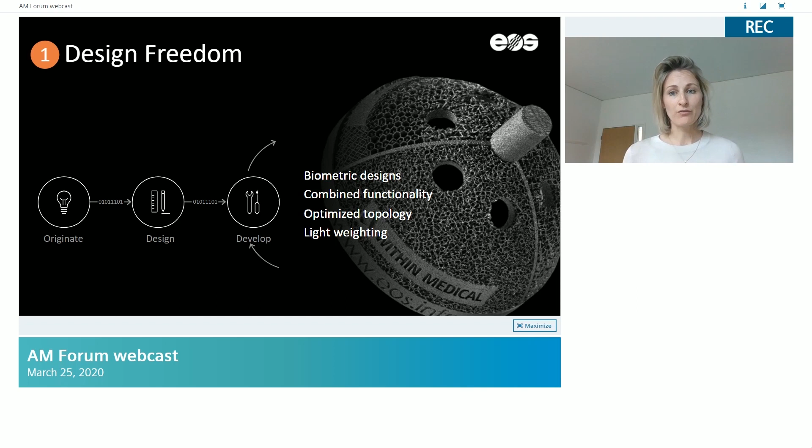So one example is parts in a cooling fan. Normally you need to have over 70 parts assembled to have this fan working in a cooling system. And with additive, we were able to build that in only one part. And I think you can imagine what this means for reducing the cost that you have through assembly, and also reduction of resources in general, and also material that you waste.

Another great example for freedom of design, and I have them here in my hands, are some insoles that we're working on together with our partner Aetrex in the US, and we were developing that for 2 years. The philosophy behind that is that no feet are alike. What we have a lot with shoes is that we have shoes that are the same, but actually our 2 feet are not the same.

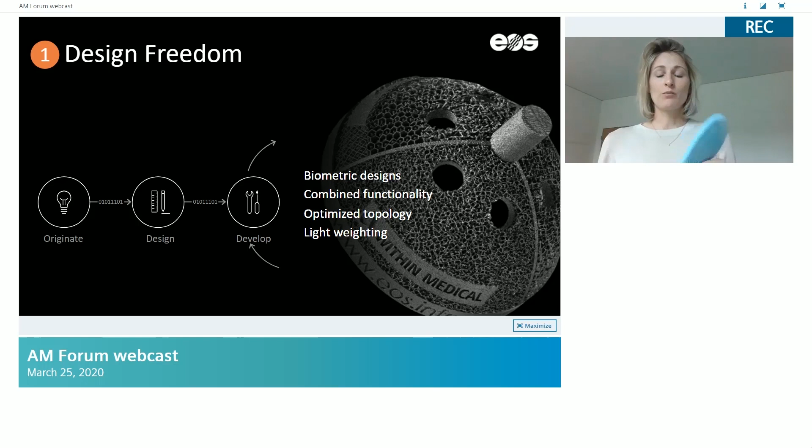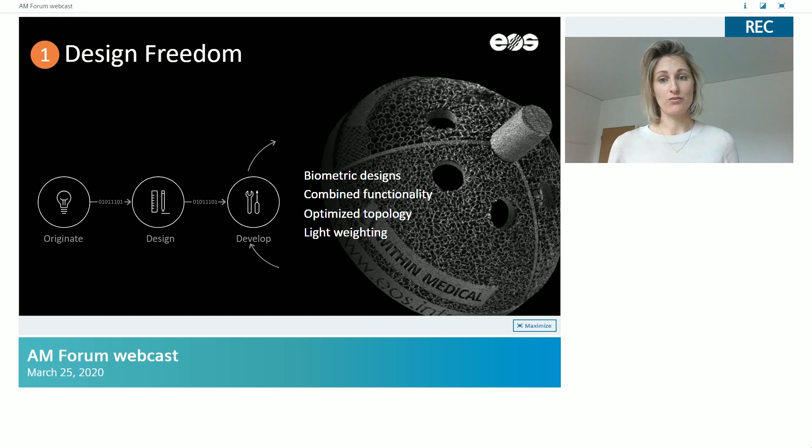So with additive, and the great scanning system and solution that Aetrex was offering, we were able to produce these insoles, making sure, and maybe you can see that here, that every part of the insole has a different thickness, fitting to the criteria and the pressure map that the scanner shows us. So making sure that it fits the feet best and supports the feet the best way possible. I'm really excited about this project because we can see here what kind of great product innovations we can realize with additive.

So another point that I want to talk about is speed to market. And there's an example, I also have it here. It's developed by our customer HEXR. We were supporting with that. And what you can see is not only that you can customize it, which is a tendency and a demand that we see in the market right now. And it's through a digital app. So you have it on your iPhone, you can scan your head, and within 1 minute you have your file that is fitting perfectly to your shape.

And what was realized here, with the way this interior was designed, is that the pressure the bikers could get when they fall down is much better distributed than conventionally. So it's a much safer product. And talking about speed to market, here the product development time could be reduced from 2 years to 3 months, which I think is massive. And when you talk also about distributed manufacturing and on-demand manufacturing, that is a very important aspect in keeping up the speed. I think that's a great example that I want to share with you.

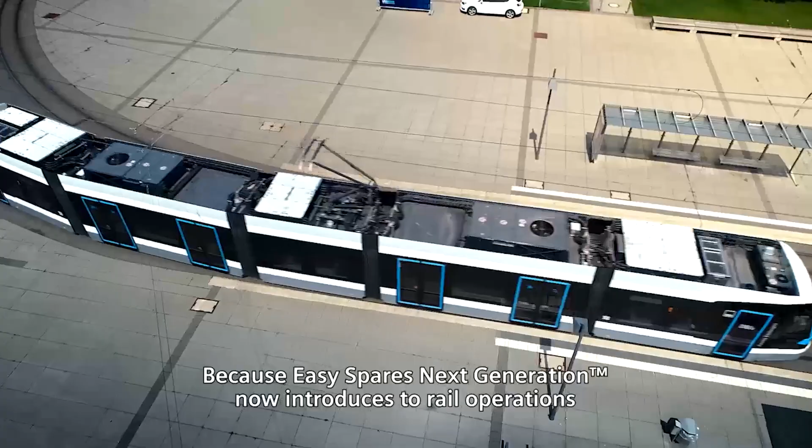Time. It runs our world. It's fundamental to our daily lives, and we prize it highly, both in our private lives and in business. Because when we save time, we create efficiency. Easy Spares Next Generation operates on that basic principle. Because Easy Spares Next Generation now introduces to rail operations what we've already been enjoying in our everyday lives online. Extremely fast, simple, and reliable delivery.

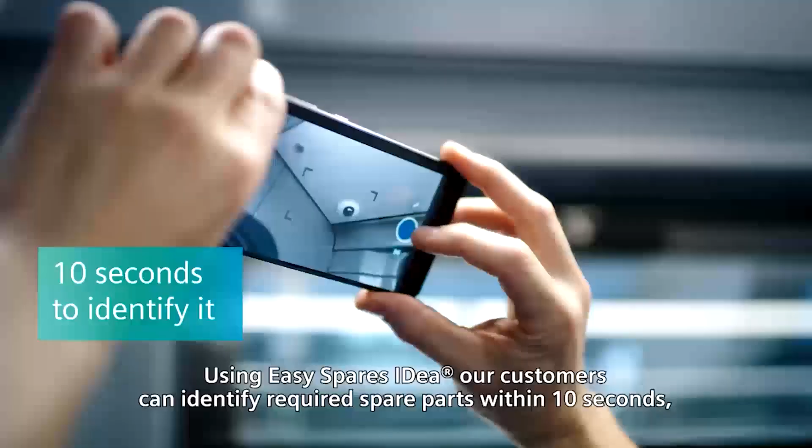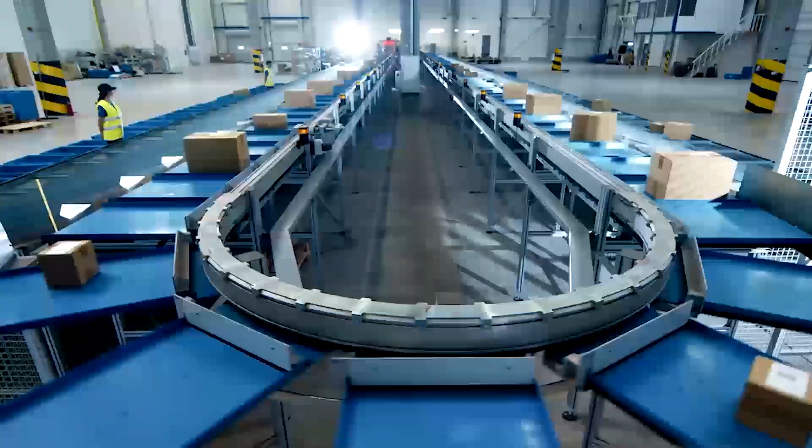Using Easy Spares IDea, our customers can identify required spare parts within 10 seconds, order them online in 3 minutes through Easy Spares Marketplace, powered by RailMall, and receive them within 24 hours. That's how our customers not only save time, but also lower their costs and guarantee their passengers optimum availability. Siemens, ingenuity for life.

Within the Easy Spares Marketplace, you can order your spare parts from your physical stock within 24 hours, or if not available, from our virtual stock printed on demand. But why do we use additive manufacturing for spare part supply, as we have all relevant spares on our physical stock? In the rail industry, we have a lot of different vehicles all over the world with low and medium quantities. They are in operation for 30 to 60 years. Some spare parts are required after 15 or 30 years for the first time.

If you try to order this part from your previous supplier, or if you want to restart the production in your own facilities, you will most likely have problems like one-time costs or minimum order quantities. Siemens Mobility, as one of the first rolling stock providers, identified additive manufacturing as a solution for print on demand and manufacturing close to the location of demand, instead of manufacturing thousands of parts and taking the scrap risk. This technology was used before mostly for prototyping. To use it in a conservative and strictly regulated rail business, you have to solve a lot of topics before. This is what Siemens Mobility has done since 2013.

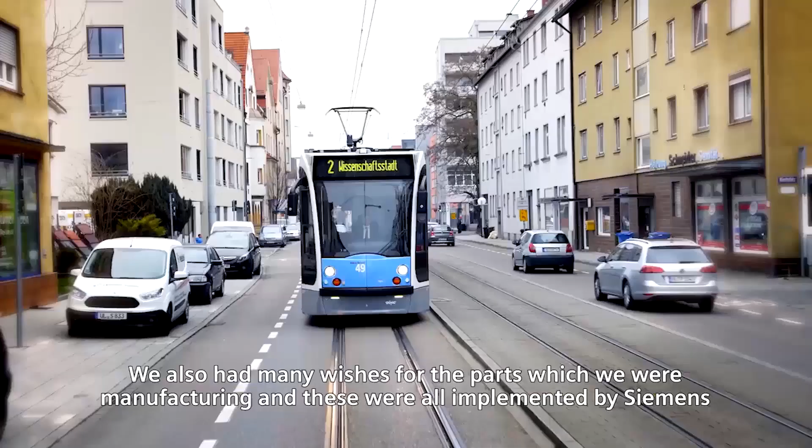The important point is that we have established qualified business, engineering, and manufacturing processes, which are certified according to all rail industry-specific regulations. These processes are the basis for our worldwide locations, which are in regular exchange with our Center of Competence here in Erlangen. The Center of Competence can check the status and the setup of the network printers online and review the results of the defined quality tests.

Also, all engineering work results will be finally checked by our experts here in the Center of Competence. Wherever a spare part will be printed by Siemens Mobility, it will be the same high level of quality. But additive manufacturing is only one part of our digital service portfolio, as you can see now in the next video.

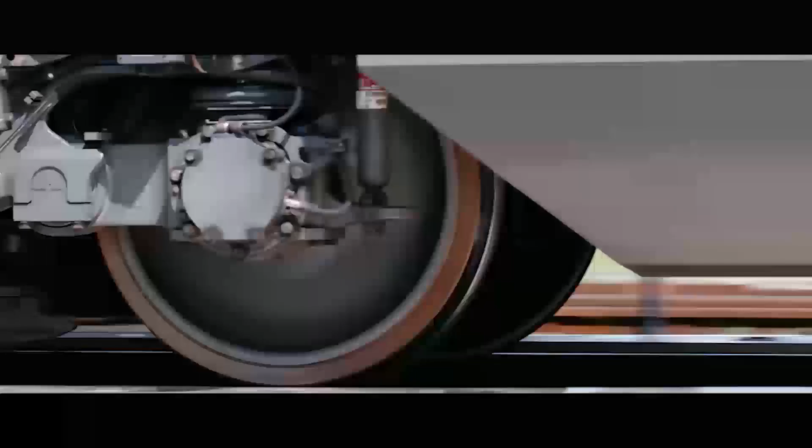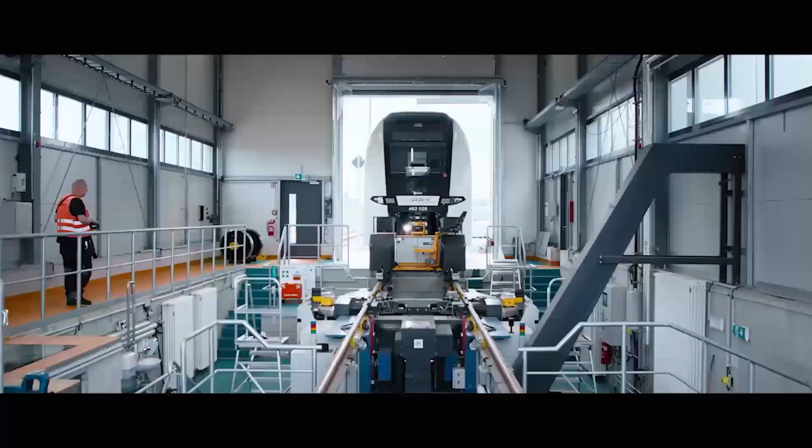What does it take to be the best service partner for railway operators? Operational streamlining, inspections, and maintenance all under one roof. Paperless, our fully digital depot is a world first. Using our open ecosystem Railigent, we combine the latest software, technologies, and processes to create a network that works in perfect harmony.

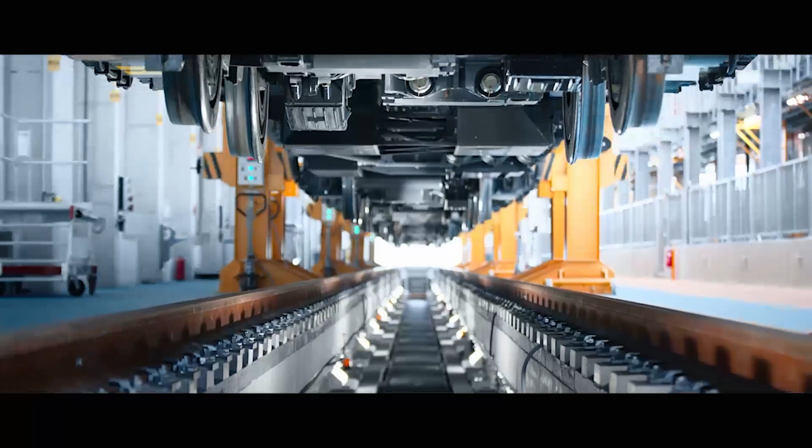The ability to predict and eliminate errors before they occur. Thanks to our servicing experts and our skills in data analysis. Everything prepared and in place. That's why your train is back on track quickly and on time. Every day and every night. For 100% system availability. Helping your trains exceed your customers' expectations.

So as you can see, it's only a small part of our digital services, but the current entire process chain, including the quality assurance process, is very complex for additive manufacturing in comparison to conventional manufacturing. And maybe you can imagine the required efforts to manage the process with tools which are either not available or working with different data formats. The result is a huge manual effort to hand over data without loss of data quality.

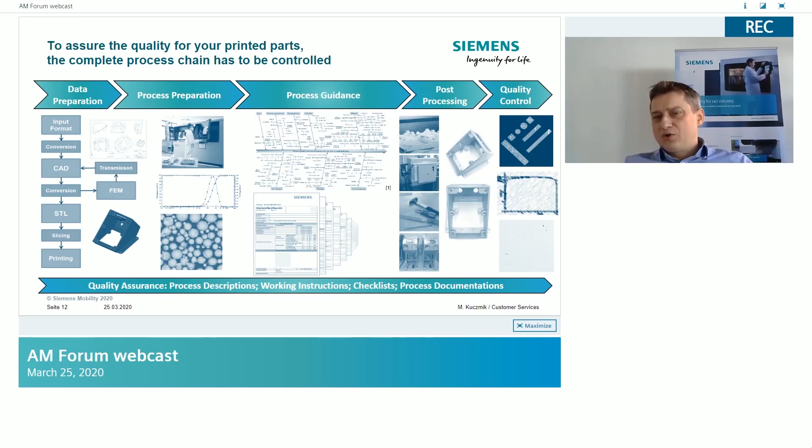This intensive work is not appropriate for a depot where the employees just want to print a spare part and do not want to be specialists for additive manufacturing. Carsten, perhaps you could show us now how Siemens Digital Industries can help the users and the machine providers with these challenges.

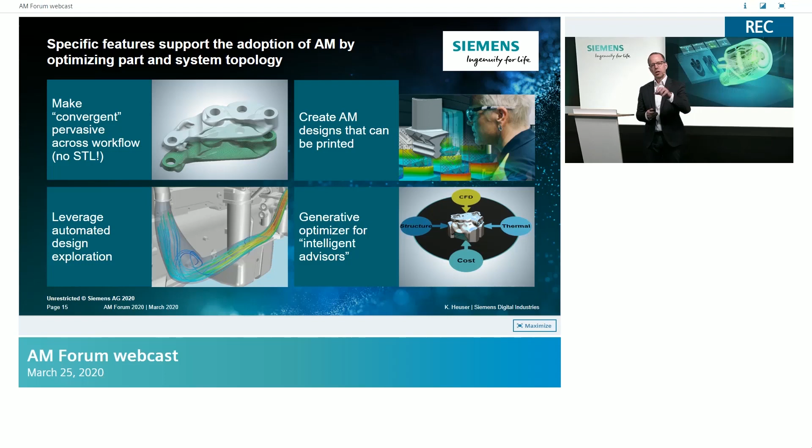But if you dive in this digital twin one level deeper, then there's a material. We heard already from Marie on the material, and Michael talked that the process chain needs to be under control. And therefore you see two examples here: next to the most powerful digital twin of the product, we now have a digital twin of the material. Digital material can be designed and optimized by software features. Just recently, we acquired a company, Multimechanics, making this possible, that you can optimize the actual material properties before you print and then learn at the end.

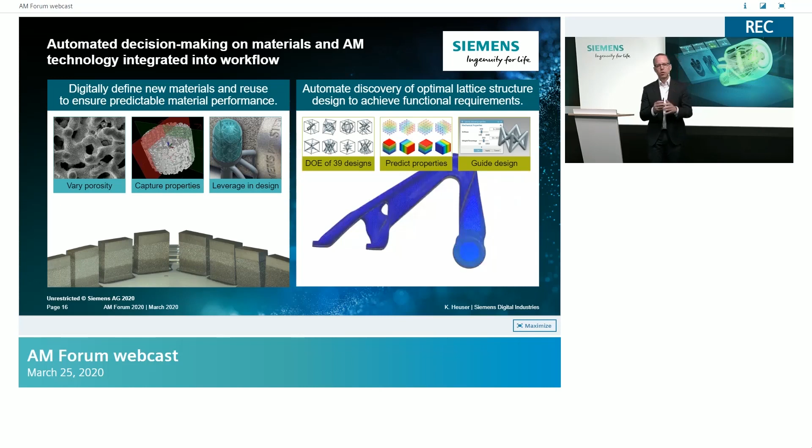Furthermore, by knowing the material properties, you are able to design experiments with specific lattice, and any kind of structure will offer you a full new spread of designs in terms of material. So this makes a digital twin of the product, but then the next situation is people very often still try to print and find out it's not working. And a lot of power goes in Siemens into the development of tools for the macro and the meso level defects through simulation prediction. Here you see the examples.

Pretty easy, a tool which is from Atlas 3D. We acquired Atlas 3D at the end of last year. A very easy tool where you can combine now deformation with support structures. This is a cloud-based tool. It will be part of our AM network later in the year. And it's a pretty easy to use tool.

And in the middle, you see another prediction tool where layer by layer, we can in the meantime predict the thermal behavior in a selective laser melting process. And even further, you can now start not only to predict, you can compensate by the software to have a first-time right printing. And another step forward, at Formnext, we presented for the first time that another tool is coming up on the horizon. And there we can optimize the tool path to eliminate localized defects before you start the printing. What is the benefit of this?

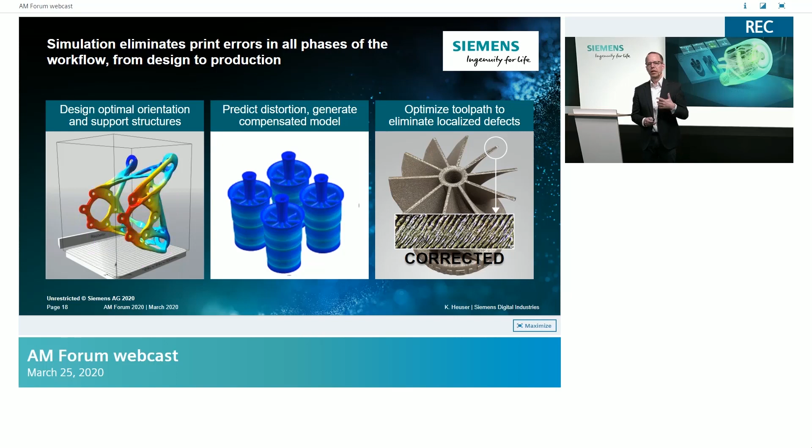This lowers at the end the production costs because it's first time right printing. And with this, you can really simulate the process before you start printing. Now, if we are now finished with the digital twin of the production, the process, the next step is how to plan, run, and monitor an efficient entire additive manufacturing factory.

One aspect is on the digital layer. For sure, you need to have a software to plan and execute when to do which job on which machine, from configuring the machine to getting worker instructions directly at the machine. It's paperless, and we have proven this in different kind of facilities already, to managing the processes, traceability, tracking of all your powder, recycling the powder. So this makes the digital backbone to plan and execute the factory on a digital layer.

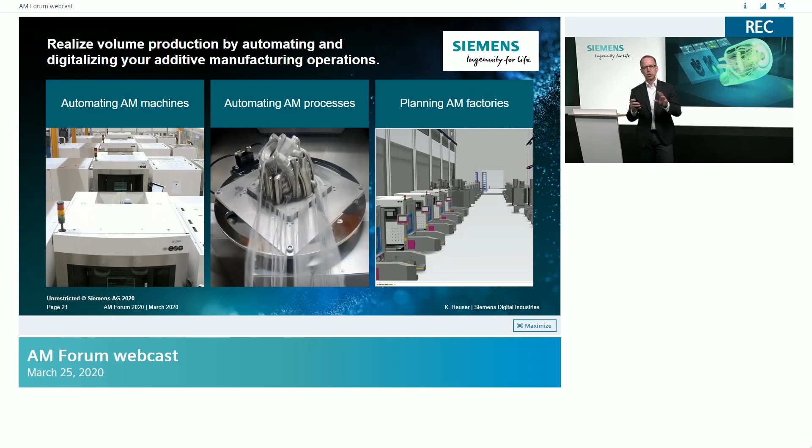And then last but not least, we're moving into planning full-fledged additive manufacturing factories. We have a planning team of consultants working together with our machine partner to plan digitally with our tools complete additive manufacturing factories. The input parameters are the machine, the costs, the requirements, and the output parameter is the quantity of the production, the throughput, the staffing, and everything like that to really plan and operate the factories very efficiently.

But last but not least, when you install the factory, you need to be sure what happens inside. And there, once more, you have two layers. You want to know at all times, how is my machine doing? How are all the machines connected from the different entities here? And it's about machine monitoring.

With our cloud-based MindSphere solutions or Mendix as a platform here for low-code coding, we have proven in the meantime that you can connect and get a system with all different kinds of machines in one dashboard to really manage and improve your efficiency of the overall equipment in your factory. Already a few leading players are connected in this system and are working.

The next step is how to optimize the cooling of an ICE train. This is now a concrete example, and I want to send my regards to Helmut Zein in Hamburg. Helmut is heading the team here and worked for the AM Forum to make this use case happen. And this is done as well in collaboration with Michael from Siemens Mobility.

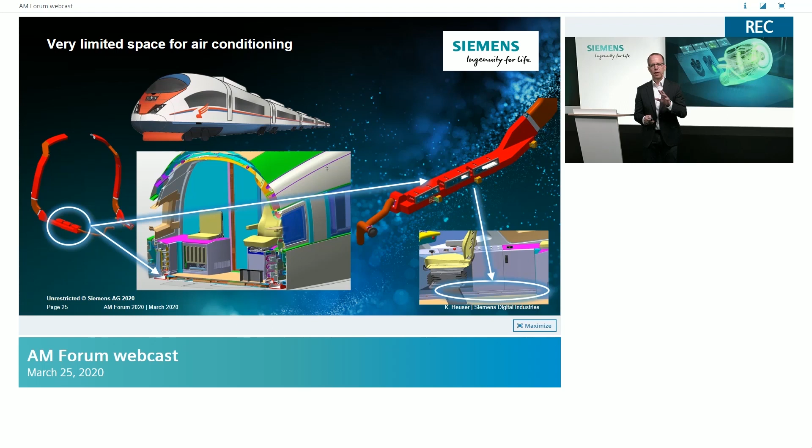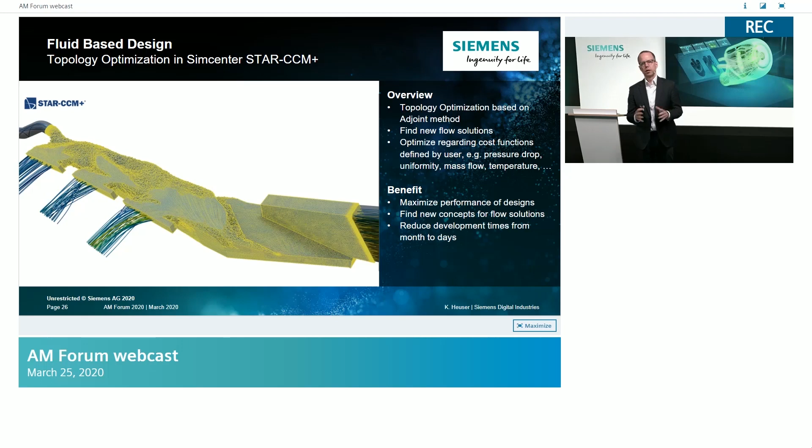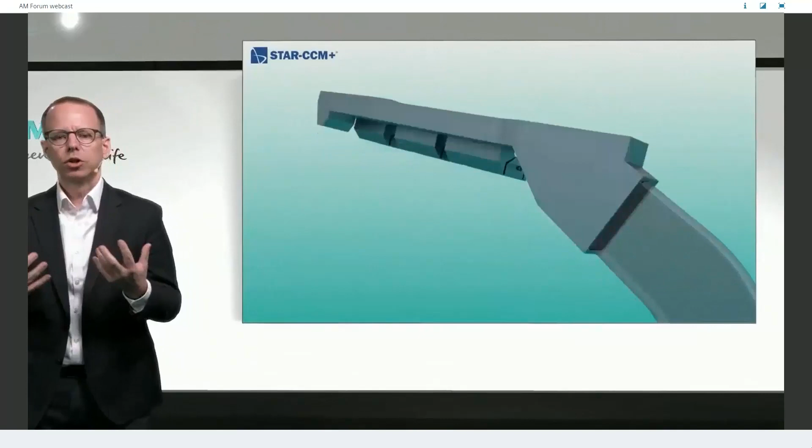Let's dig into this in examples. First, our experts took the 11 parts and threw the 11 parts in our software and transferred it in one software tool, which is part of our Simcenter STAR-CCM+. And now we see in a movie here coming up how it looks that our STAR-CCM+ now becomes more or less the designer. So the software is now starting to iterate in many, many steps.

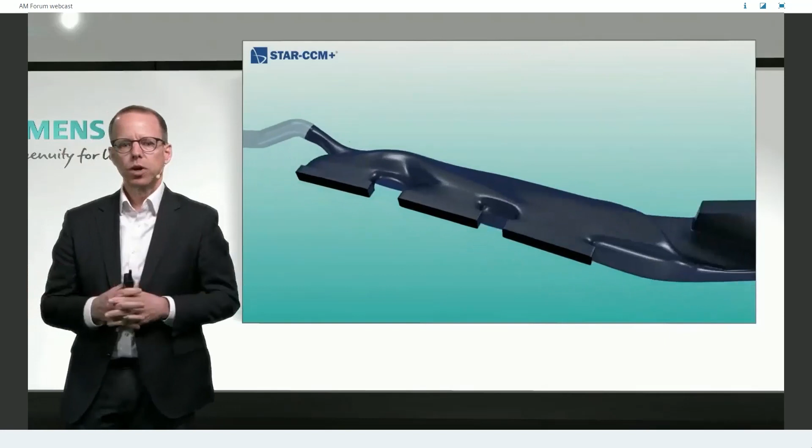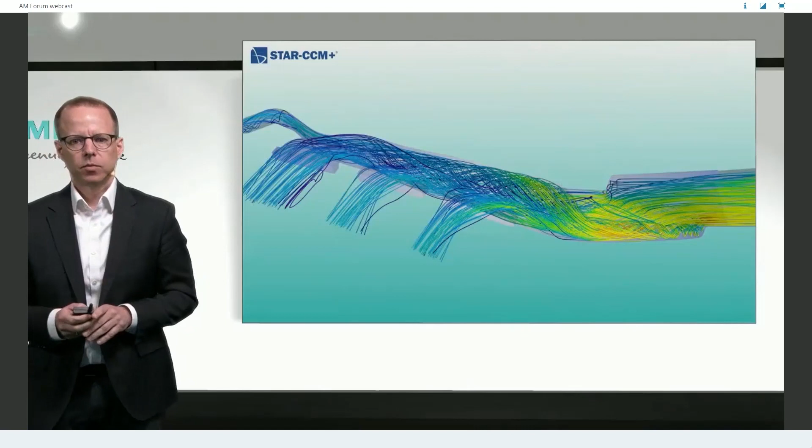And here at the end, it was more than 100 to 200 iterations to optimize the design to the perfect flow and to the least pressure drop along the area. By that, you come up with a crazy fancy design normally, which is optimized for the flow. But in the next slide, you will see here, it's not always the best in terms of that you have optimized for any kind of design. Now you have the benefit that you stay in one software suite.

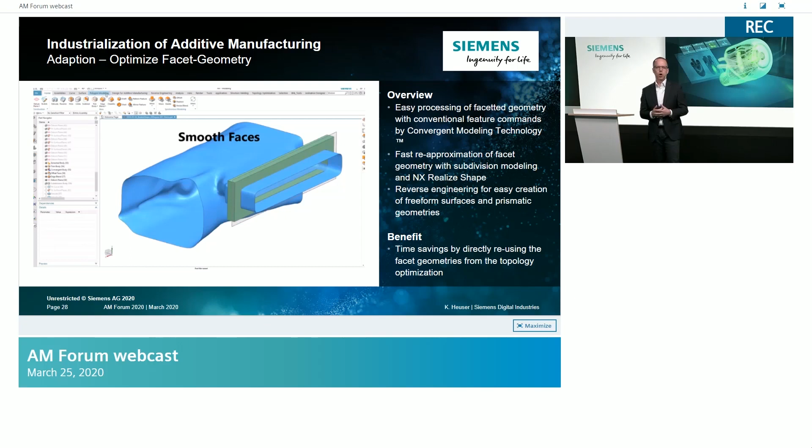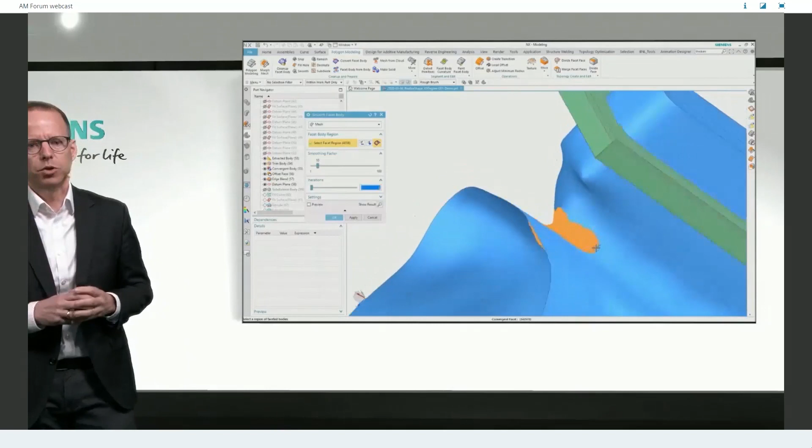And once more, we throw it now into our software and we start to optimize it. In the video, you see how now we can start to optimize areas where probably the simulation, the topology have given us something we have difficulties with in the later printing. So you can paint it, or you can even optimize and automate this process here to really now change, for example, parts of this geometry with your classical, well-known CAD tools, and you can start to optimize it.

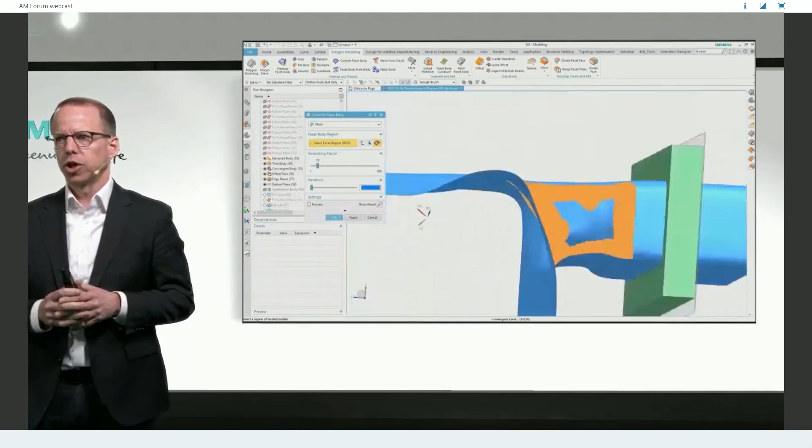You can use and provide any kind of the classical tools as well to further adapt and design further geometries into this design. This saves you a lot of time through a fast and efficient workflow, and you reduce the need for any physical prototype at the end because you can optimize this part already in this software.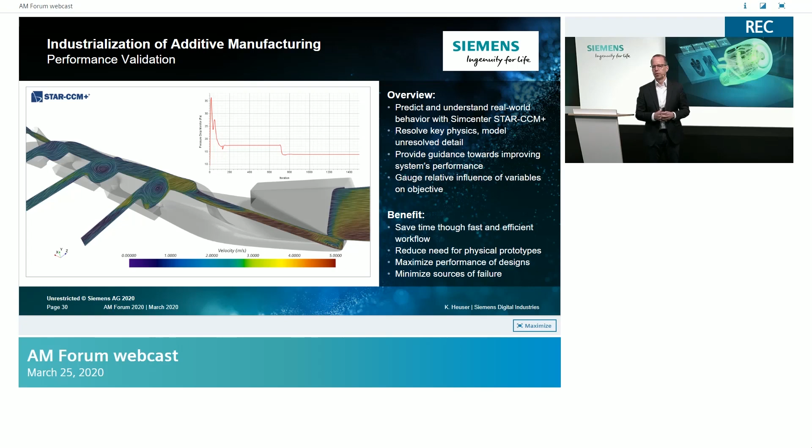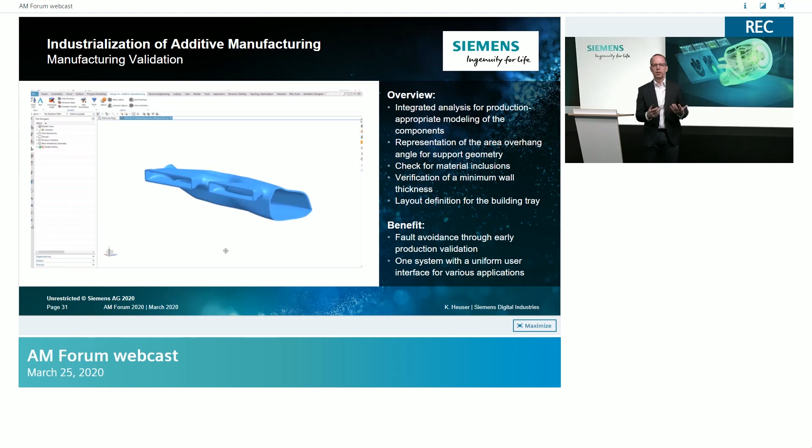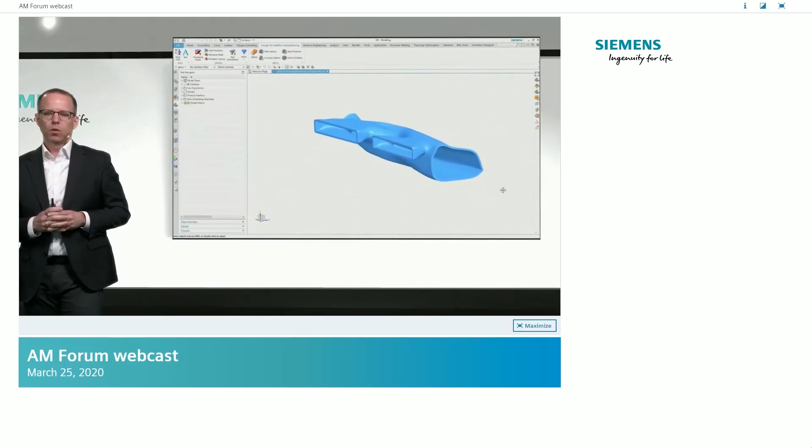So let's go further. Now we have a digital twin of the product finished, accomplished. Now the question is: is this printable? How to validate the manufacturing? Let's go once more into our software suite, where we now start to integrate and look into the production. One first question you would have is: is the part really well positioned? What are the wall thicknesses? Do I have some checkers who can tell me if there are some inner cavities where I would have problems while printing?

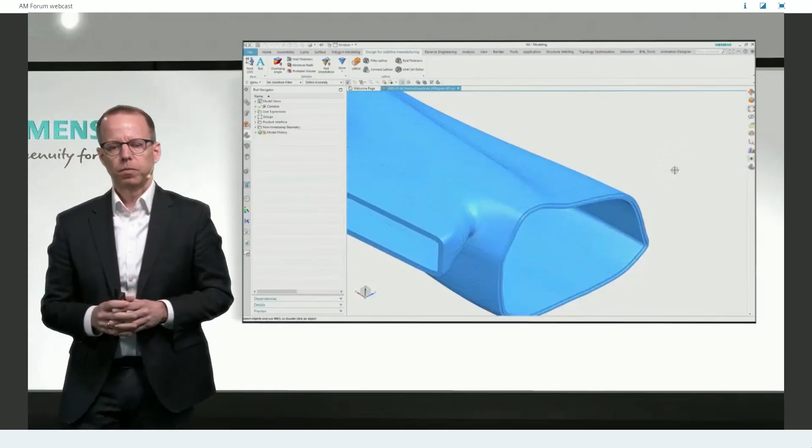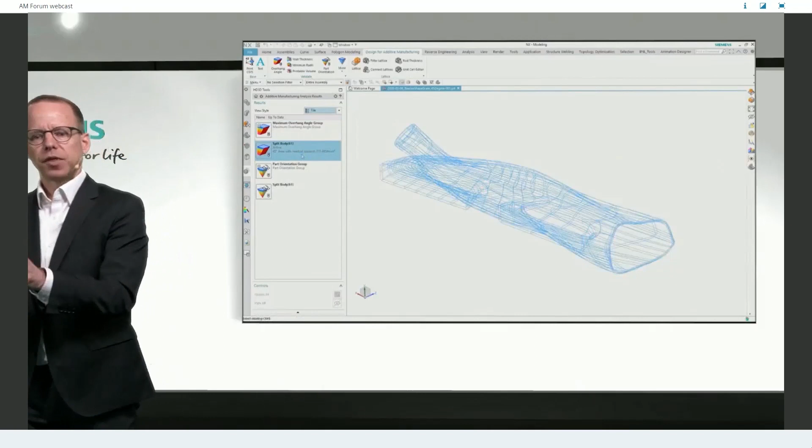So in this part, all these checkers are already in our software. So you just need to use them in the software and start now to optimize with these design checkers, if you have some inner area, if you have some overhang which will not be printed. So a lot of intelligence from the printers is already incorporated. And once more, if you find something here to change, you just go back into the digital twin of the product and you can change it here with a mouse click.

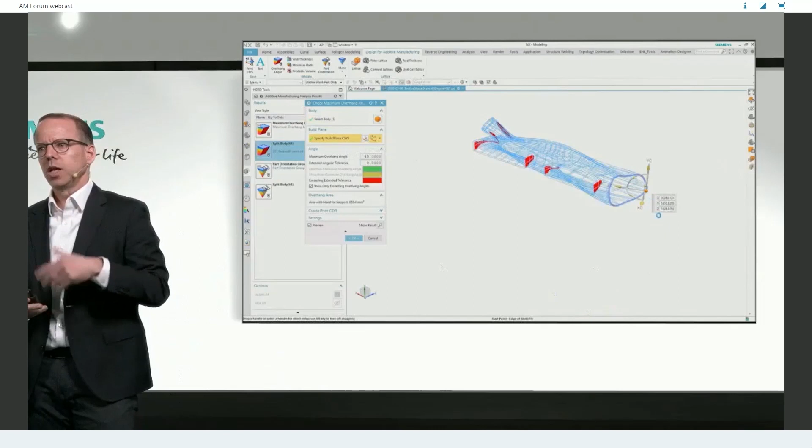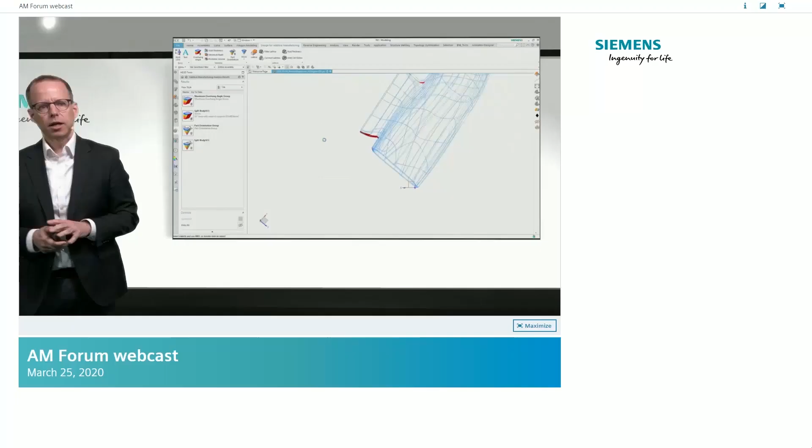Here you see some red marks. These are actually the design checkers where you can really now improve this process. So this is one thing. And the next thing is how to integrate the printer interfaces. I will explain on the next slide that we now have connections through all the Materialise connectors. We have direct printing connectors like EOS Print. As well, with Cura, we now have connections to other printers like Ultimaker.

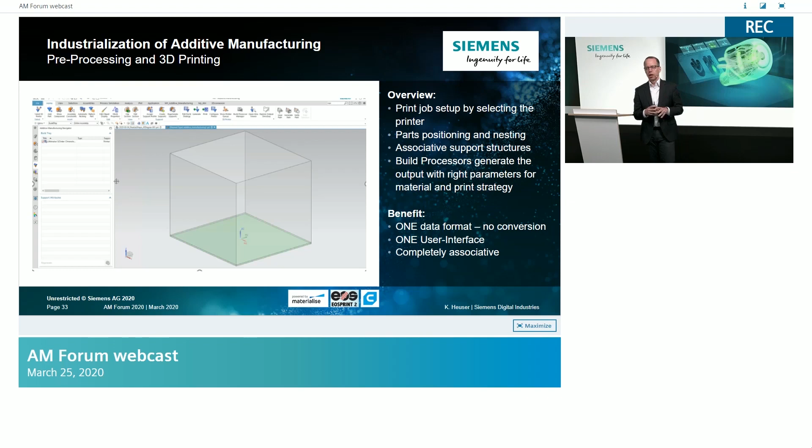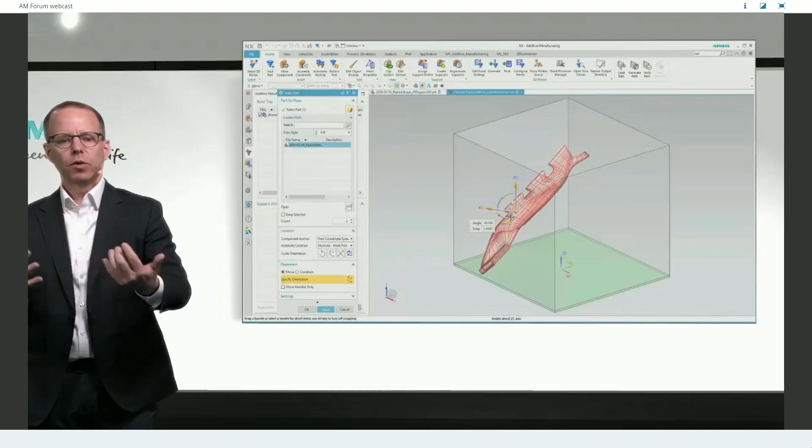And once more, what you want to have is a view into the printer before you start printing. In the next video, what you will see here is that we now have a virtual build chamber of such a printer. In the printer, you upload the part, and then you can start to optimize this part, and we have algorithms already. These algorithms will help you to orient the part based on what kind of printer you select. And depending on that, you can optimize what kind of support structures you really want to use.

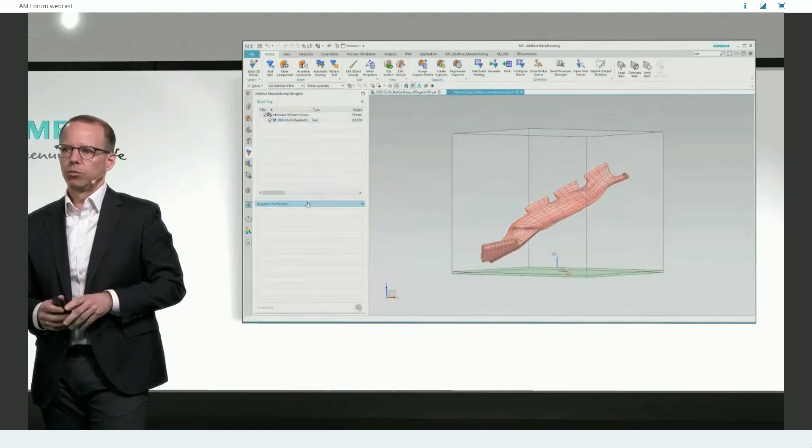And as I already mentioned, in the future with Sunata, this is also on a cloud system, making it very, very easy and automated, once more coming to a really improved flow here. And here you see now how these support structures are generated while I talk about this. This was done on an FDM printer, but it could be done on an SLM or any kind of printer. All these interfaces are already connected.

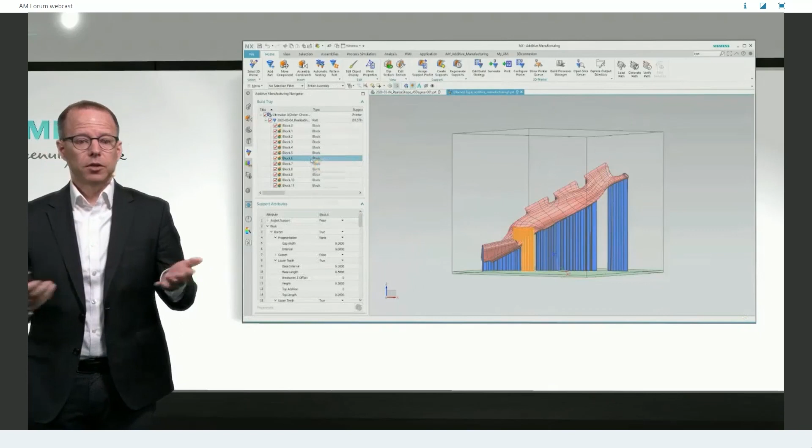So what is the result? If we look into the digital enterprise slide once more on the next slide here, you will see the result. On the left-hand side, we started initially with 11 parts and ended up with a much improved part, which is printed out of one piece. Then we ran through the full cycle of the digital twin of the product and the digital twin of production. We looked into real production, and at the end, we have a 26% flow improvement from this new cooling. And I am already looking forward to seeing it in the next high-speed trains from Siemens Mobility, giving you better air conditioning.

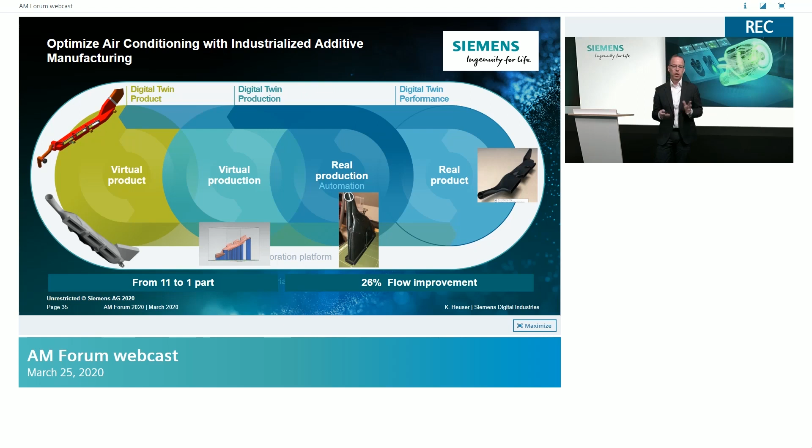So as Michael already explained, what is the rationale of this toolkit, as I just mentioned? It's about tightly controlling the entire process chain, digital and real. It's about ideally designing parts. It's about using cost-efficient measures on low-cost parts. It's about certification. It's about automating and auditing the full production line.

This is what we stand for, what we're working on in co-creation with our partners on the machine system side as well as on the end customer side. And that's what I want to show you in this regard. And therefore, I think, Nicholas, I would like to hand over to you. Thank you for the attention.

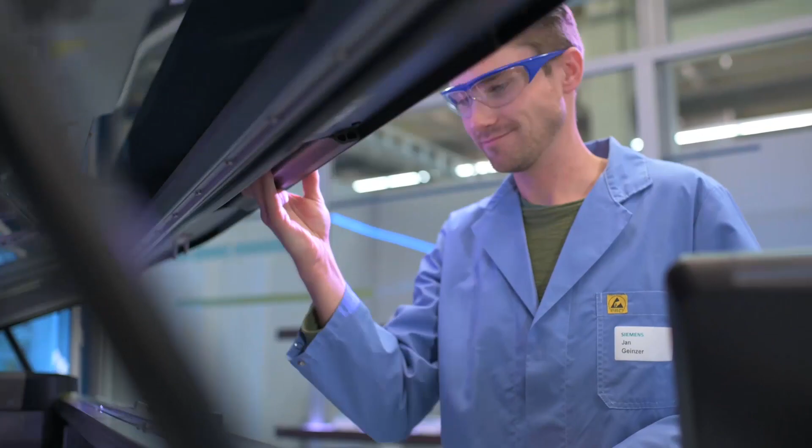The AM Experience Center has been in operation for 1.5 years. And so far we've had roughly 4,000 visitors coming from a lot of different countries in the world. With a team of technology experts running the different kinds of additive manufacturing technologies, we have more than 50 portfolio elements of the Digital Enterprise solution installed live.

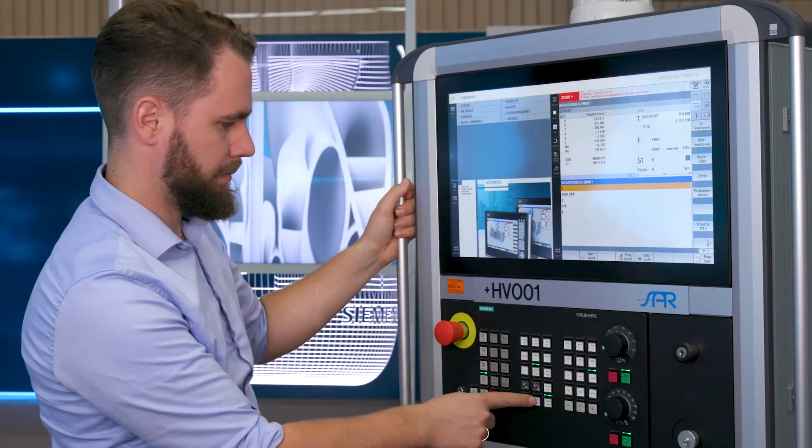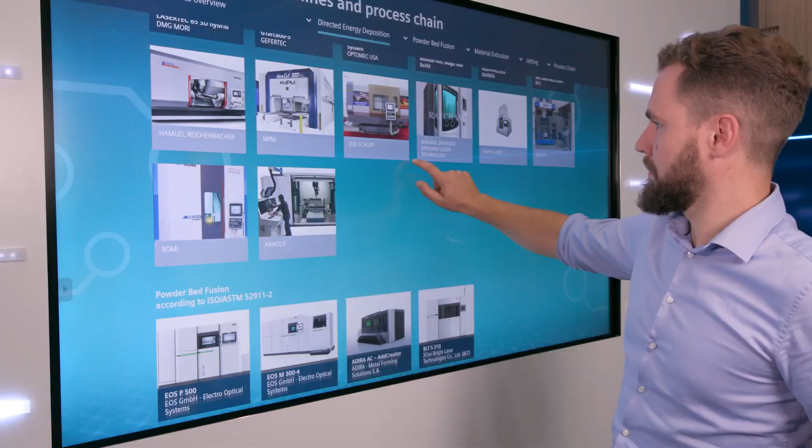It's very special that we have machines from different machine builders with different technologies. For material extrusion, we have a robot here from Comau. From EOS, we have a powder bed machine here. From HP, we have a jetting machine, and from DMG Mori, we also have a machine for the DED technology. I'm not sure if anywhere else in the world we have such a comprehensive room where all the different AM technologies are live to be shown in one area.

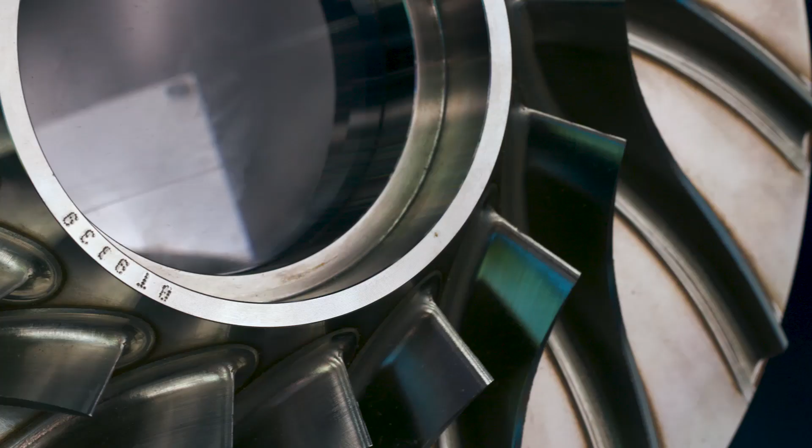For many customers, this is the first touch point to get to real industrialized additive manufacturing. They go into the room with, let's see what happens. They go out of the room saying, wow, additive manufacturing industrialization is on a level I didn't think about until 2 hours before. There are customers who have no idea what additive would mean in the future for their business. So we start to really enlighten them and have basic workshops here to find their first approach into this journey of industrial additive manufacturing.

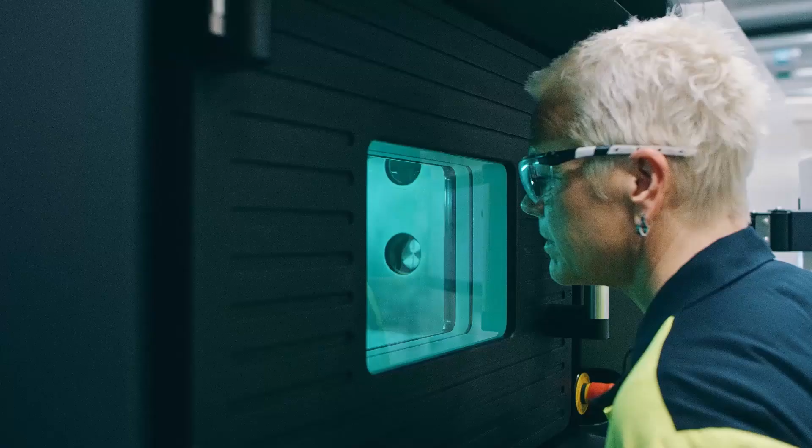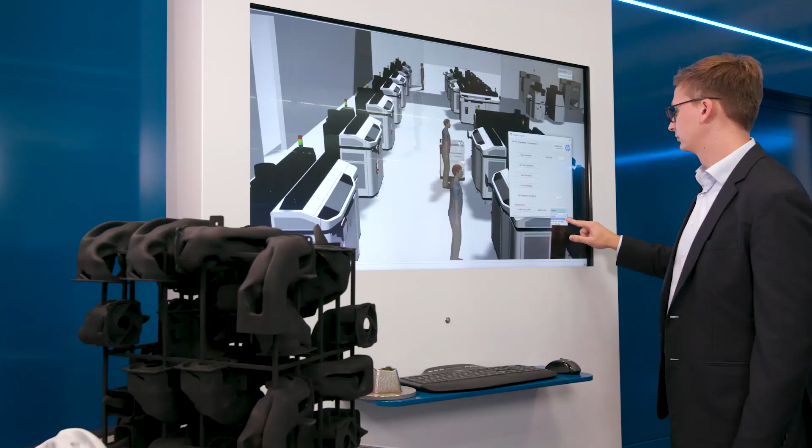But on the other side, we have customers who are experts, really experienced in additive manufacturing. But they may struggle with isolated software solutions or non-connected machines. They come here, bring their own ideas, and have extensive workshops discussing which kind of material works in which kind of environment, in which kind of machine.

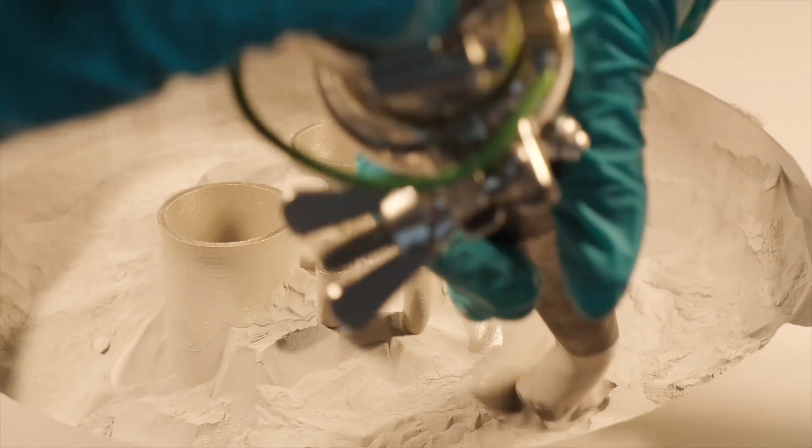The content we generated here in different aspects can now be tailored and multiplied to different locations in the world. This happens in Chengdu in China. This is under investigation in Singapore. This will happen in the US in different locations. So this will grow now into local operations for the different focus areas for additive manufacturing in the world.